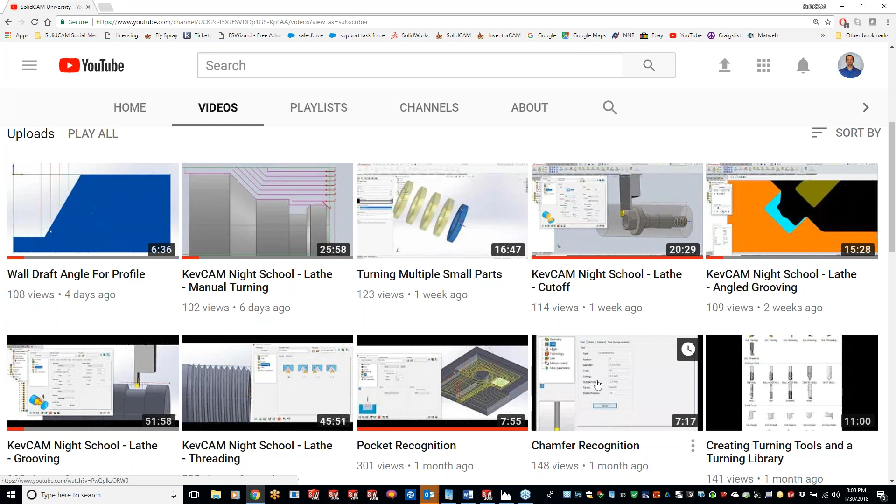Okay, so let's get the ball rolling here. So like Steve said, we are doing trochoidal turning tonight. And trochoidal turning is basically benchmarked off, or a knockoff of iMachining for milling. There's just a couple of differences in there. With iMachining for milling, you just put your material in there, and you put what cutter you're using, and it automatically figures out the feeds, speeds, step downs, step overs, angle of engagement, and all that stuff.

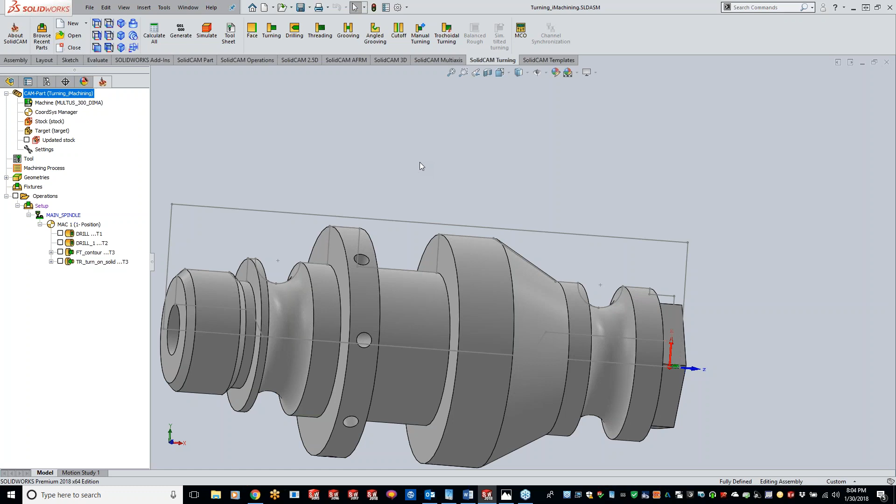When you get into an iMachining pass, what it does is start with a morphing spiral, working its way out, and then when it gets into the tight corners, it's going to automatically switch over to the trochoidal movement for you. Well, that's where the parts or operations are the same. So what will actually happen is I have two kind of examples. We'll do one kind of U-shape right here, and then we'll do one more of a boxed off area.

And as we do the boxed off area, it's going to come in here and do the trochoidal cut, kind of working its way back, and you can set it as zigzag or one way, totally up to you. And then as it gets into these tighter corners, it's going to switch over and just kind of bite away at those tiny corners for you, and then come over to the other side and bite away at those tiny corners.

At this point, unfortunately, we do not have the slide bar wizard to automatically figure out those speeds, step downs, all that stuff for you guys. I don't know if that is in the works. It's been mentioned, but I just don't know if or when they're going to be adding that in there.

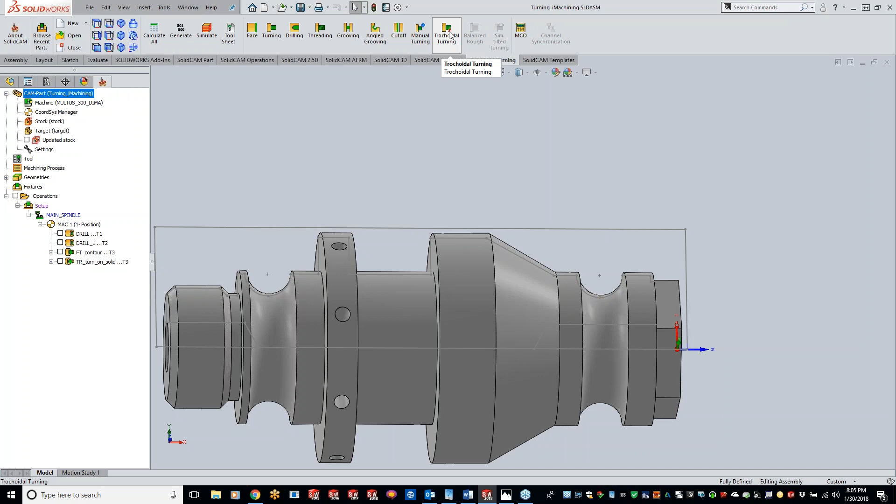So like I said, they kind of got the iMachine. You can kind of see the little iMachine logo there for trochoidal turning. So it's partially there, but it's partially not there, I guess you could say. So let's take a deeper look into what trochoidal turning can do.

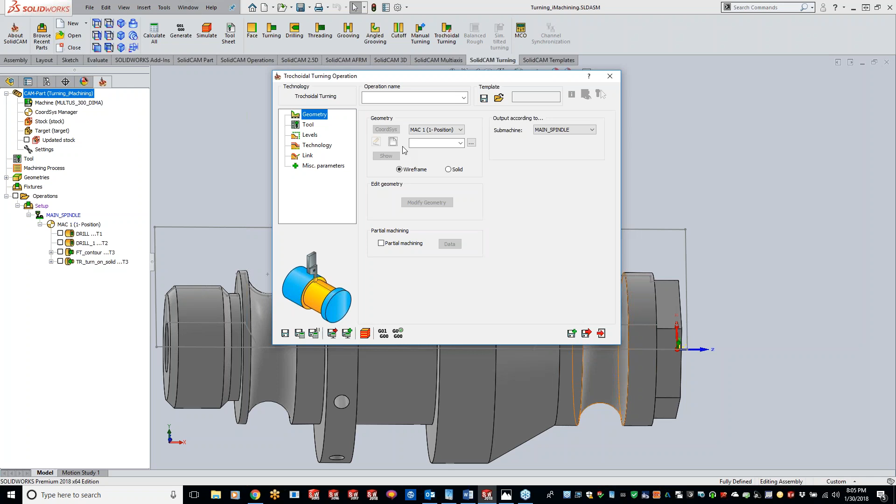So this operation enables you to turn complex profiles using a trochoidal cutting strategy. So really get that material out of there, cutting in a zigzag pattern for you guys to optimize the toolpath and really use high cutting speeds to reduce the wear on your cutter. So for our first bit of geometry, we'll just grab this little U shape here. Okay, hit the green check mark there.

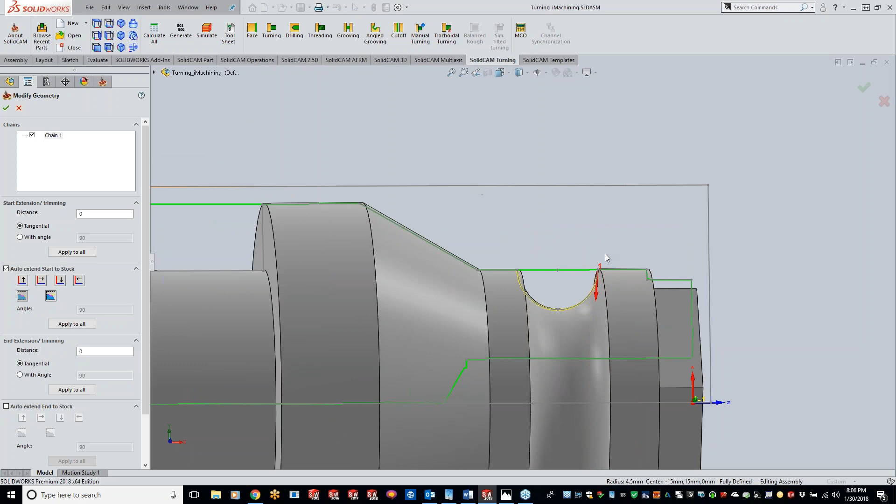All right, so we can do the Modify Geometry. It's already down to size, so I really don't need to extend the geometry up and over, because as you guys can see, our green line is our updated stock here. Our gray line up here is the stock that we started with, so anything green, we still have material left over. So you can see we have our little loop here, and then we have what we call our box area right here. So we'll do the loop first.

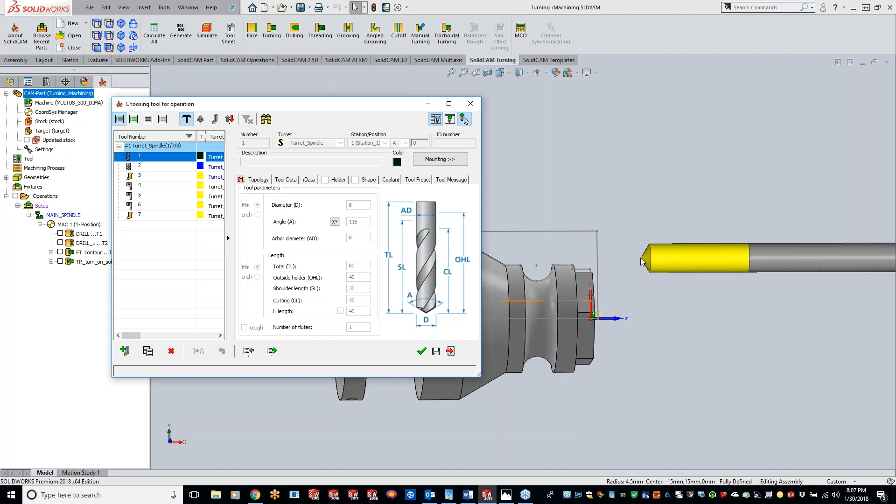And the only reason why is that with trochoidal turning, it's all based off of angle of engagement. We really can't specify an angle of engagement on a sharp edge, so it needs to be round. If you guys remember when we were talking about iMachining, you got the contact point, the ACP. That's kind of what we're shooting for. We got the round area, and we need to be able to cut into that area.

So I'm gonna grab this tool number 4. You can kind of see it's a button cutter, I guess you could call it. And like I said, this is the only tool that's going to be acceptable. If you guys grab another tool, and I'll grab this one right here, even though it's kicked off at an angle, I'll show you the alarm that's going to pop up. So let's just do save and calculate real quick so I can show you that alarm. Oh, maybe it's not going to alarm out on me.

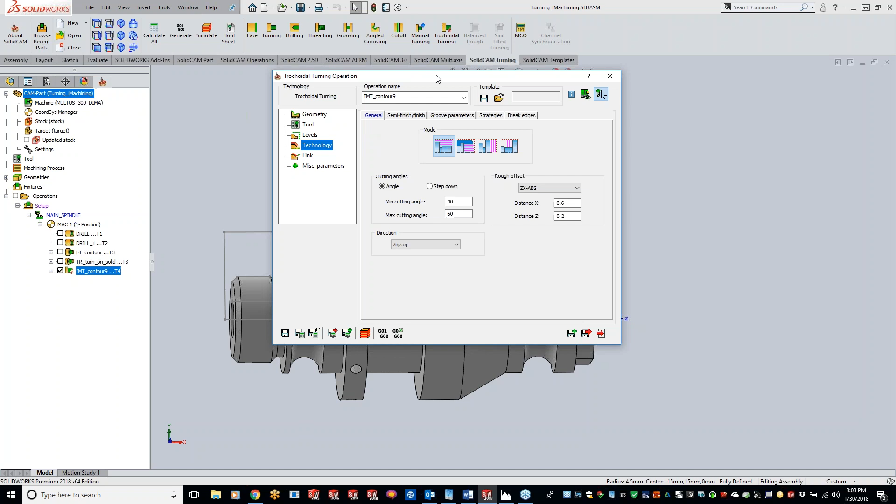Usually when it kicks out something that's not 100% correct, it's going to pop up with an alarm saying please check the geometry as it's not defined, or something along those lines. It's a little confusing at first, but when you think about it, it's telling us that the geometry is not fit for that cutter. So we just have to switch out the cutter to what we're looking for. So let me get my tool pointed in the right direction here and get rid of the additional angle there.

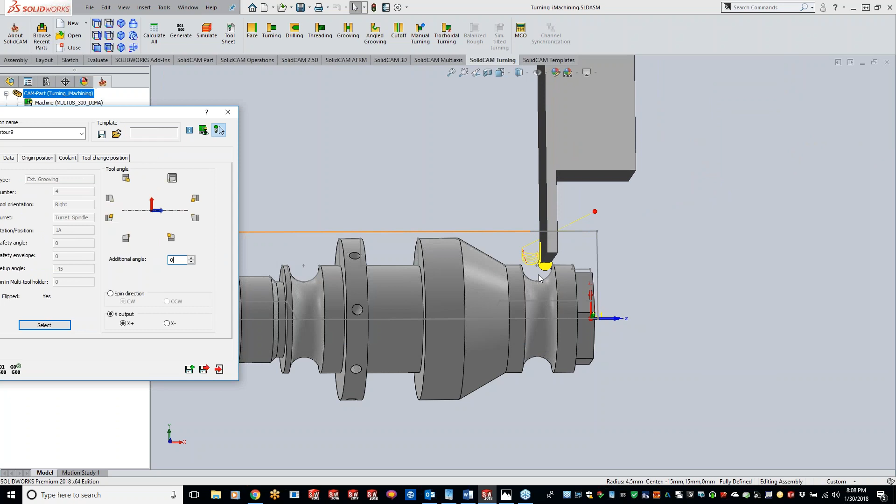Okay, so we got our lollipop cutter here, just going to be coming in there and going back and forth. So let's get to the good stuff. Levels are always going to be the same as what we've been going over. This part is done in metric, for you guys wondering why we have such a large safety distance here. Okay, so like we've talked about in the past, the modes right here are usually going to be defaulted to the correct area for you. But if not, you guys can change it.

So we have long external, or basically just an external cut, internal cut, a facing cut, and a backside facing cut. Now, this whole thing is going to look identical to turning, minus just this portion right here. So if we go to semi-finish, it's the same as what you guys saw in turning. Since we're using a grooving tool, it brings up our grooving tool parameters. And then the strategy, do we want non-descending motions or descending motions, and then the edge break. So we're really going to focus on this area more than anything tonight.

So for this one, you are going to have to input those minimum and maximum angles. A lot of the time, the default numbers will work out just fine. For this one, let's just try running a 30 degree angle and a 45 max degree angle.

That's going to be the maximum and minimum angle of engagement of that cutter that you guys can input. You can also do it by step down, so if you just want a minimum and maximum step down, these numbers come real nice because the manufacturer will actually tell you how much it can take per pass. Now with trochoidal cutting and iMachining, you can usually take those numbers and go quite a bit past that, but you guys know your machines and tooling more than anything, and as you're listening to that run, you'll know where that sweet spot is and how far you can push the limits.

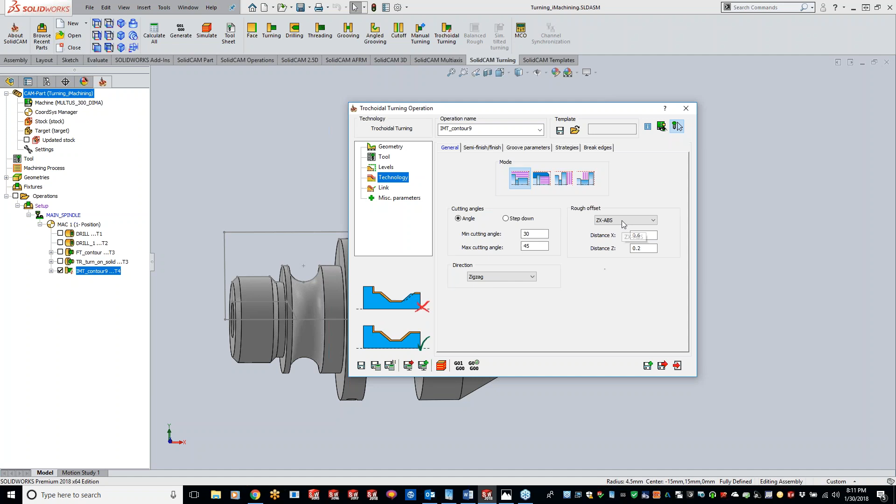And then the rough offset - how much do we want to leave for that finishing pass? We can leave different distances for X and Z like we normally do. For this one, I'll just set it up as distance, and I want to leave 0.3 millimeters on there for us.

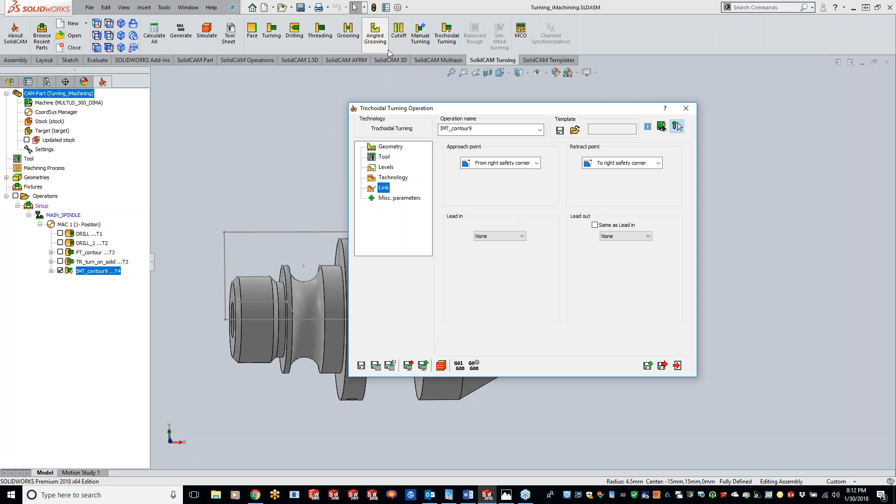Then we go to our semi-finish finish page right here, and I'll just leave it on ISO-Turning method, doing rest material only. We can turn cutter comp on. The rest is pretty much the exact same thing as what I showed you guys in the turning operation. So let's do a save and calculate.

Let's see what we created here. You can kind of see we're doing our zigzag, coming up, loop up, come back down, loop up, come back down, working our way down in there. So let's take a peek at our turning simulation here - let me zoom in for you guys and slow it down.

So there's our cut going just back and forth, getting that material out of there. Let me speed it up a little bit here - you guys are gonna be falling asleep on me.

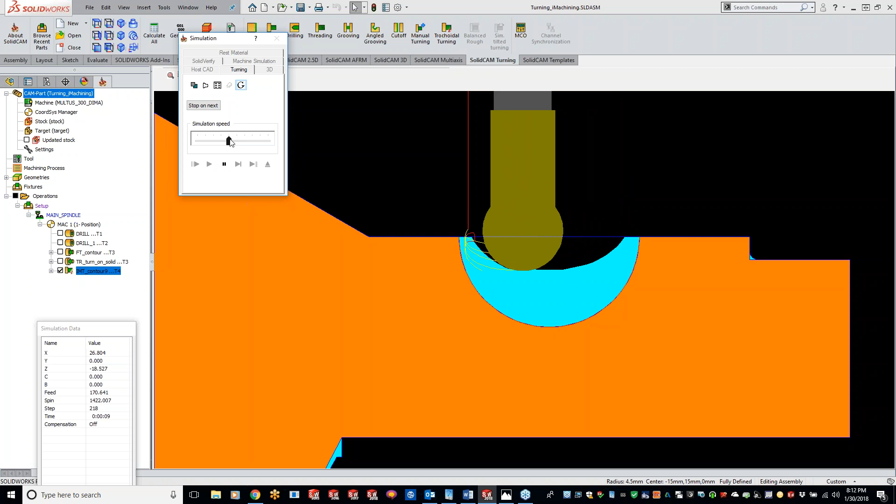Kevin, same scenario as anything involved with SolidCAM - start at the top of the tree, work your way down, right? Yep, that's a great point. I kind of shied away from that, but absolutely. So like Steve said, start at the top, grab your geometry, and just keep working your way down the list. A lot of times you aren't going to get past that technology section, especially if you don't need to put a lead in and lead out, we can just come right to technology and you're done. That goes for milling too - we have the miscellaneous parameters and some other options down here, but a lot of times you just get the geometry, tool, levels, and technology, and that's it. Just start at the top and work your way down. Yeah, great point.

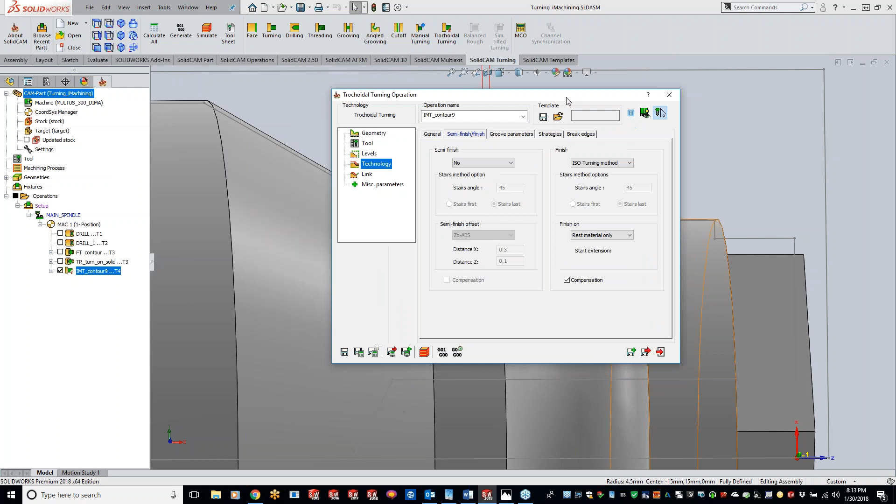Okay, so let's hop over. Any questions on doing just a round U-shaped pocket here? Okay.

So let's get into the more square style, so we can go where this is really going to help us out, especially getting into those sharp corners. We'll go ahead and grab trochoidal turning again here.

And I want to start here and end right here. Hit the green checkbox.

Now, for any confusion, if you guys haven't watched any of the other turning classes, this does not need to be a closed chain. It can't be a closed chain, just period, because we're doing a turning operation.

You just click on where you want to start and where you want to end, and it's going to fill in everything for you. Just make sure your arrows are going the right way, because if our arrow's going that way and I come to click on this side, it's going to wrap the chain all the way around the entire part, which we don't want. So if we just start here with the arrow going down and I want it to come around, we're good.

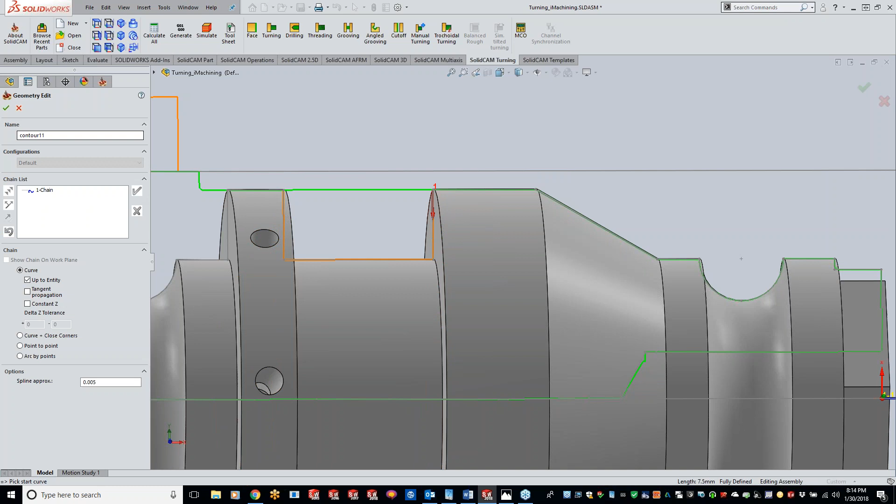Hit the green check mark. And modify geometry, we can just take a peek, but our previous operation already got that material down to size, so we're good. We don't have to add any in there.

If you guys want to add those extensions in there, we can just manually type those in right here. Or you can highlight the number you want and just click, and it will add that number in there for you.

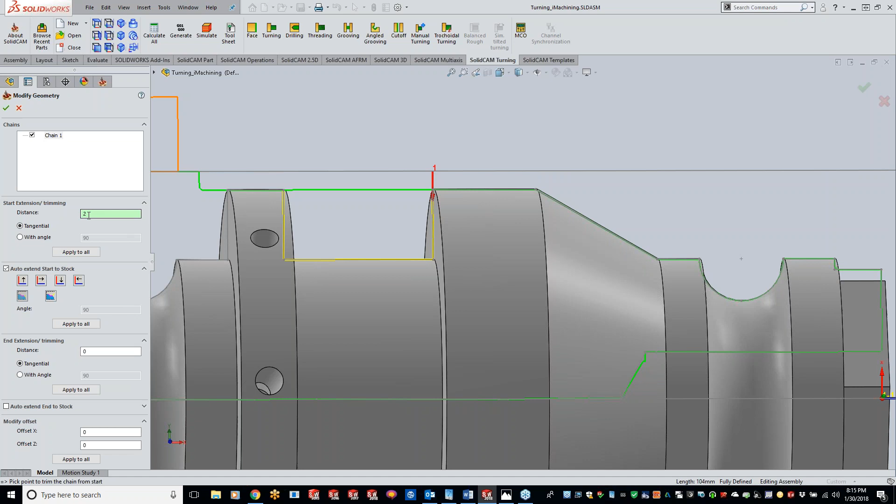So, okay, we'll accept that.

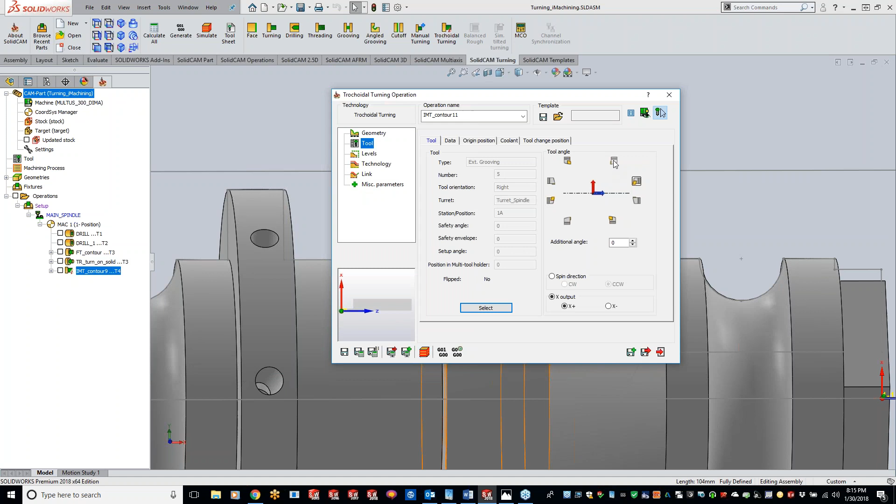And for this one, we'll grab another button cutter. Grab just a little bit larger one here. So we're using a 6mm button cutter. And get my tool pointed in the right direction here. So it looks good.

I always kind of like to come in here, especially more turning than milling, and have my tool come in here and get everything, make sure I'm pointed in the right direction, my tool is oriented. If you guys are working right now and your mouse isn't showing that, just click this little button right here, the visual tool, and that will pop up the tool for you.

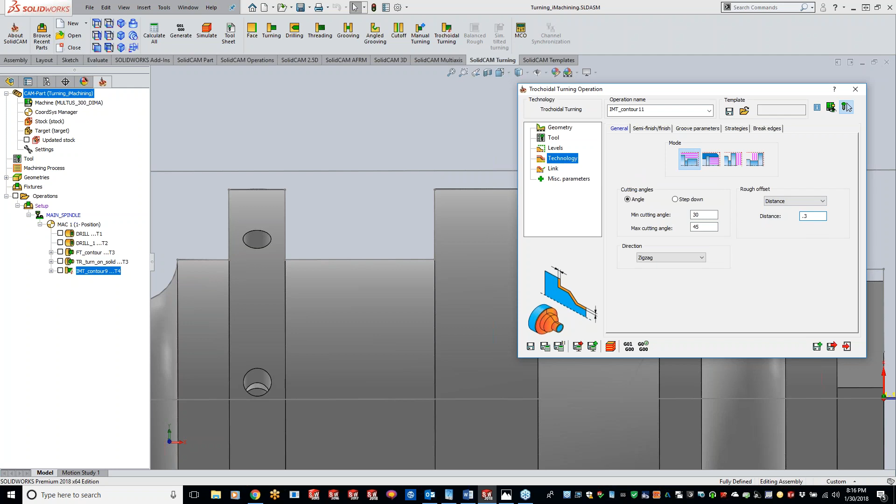Safety distance, I'll just leave it standard here, and I'll use that same 30 and 45. For this one, we'll just do another distance here, the same 0.3mm. Save and calculate. And there we go.

So let's go ahead and simulate this.

Now, you guys can also use this on partial pockets. So if we didn't have this space over here, you guys can set that up to do as a partial pocket. One of our customers, I think it was one of your customers Steve, was doing a partial pocket, but he wanted to go just one way, starting in one direction versus the way it was shown.

You guys kind of know with iMachining for milling that it pretty much starts where it wants to. We can try to guide it in the best direction, but it just looks at the optimal toolpath. Well, this particular customer wanted it to start this way and this way only, and we actually got that changed, implemented in the next service pack.

So you guys will actually be able to, based off of the chain direction, if we would have chained over here and started this way, it will go the way that we specified. So if you guys remember, let me just play this through again. I actually chained with the arrow going down this way, over and up, but I'm starting on the left side, the opposite side that I selected. So it's been fixed and put in there.

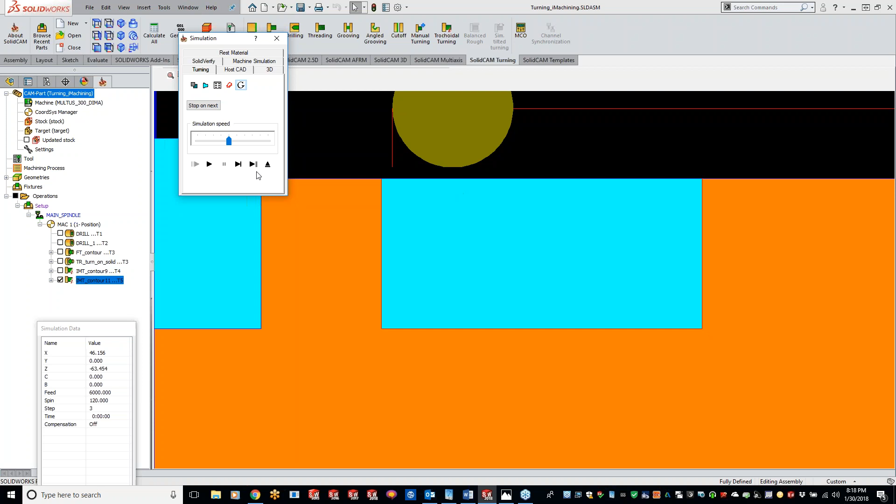Now, if you guys want to, there's another way of going about it: you can change up your angles a little bit. If you just change your angle up maybe 1 or 2 degrees, it will actually start over here because it's all based off of the angle of engagement. So let's play this through right here again.

So Kevin, really just the trochoidal turning is going to be faster for getting the bulk of the material out of there again? Yep. Okay.

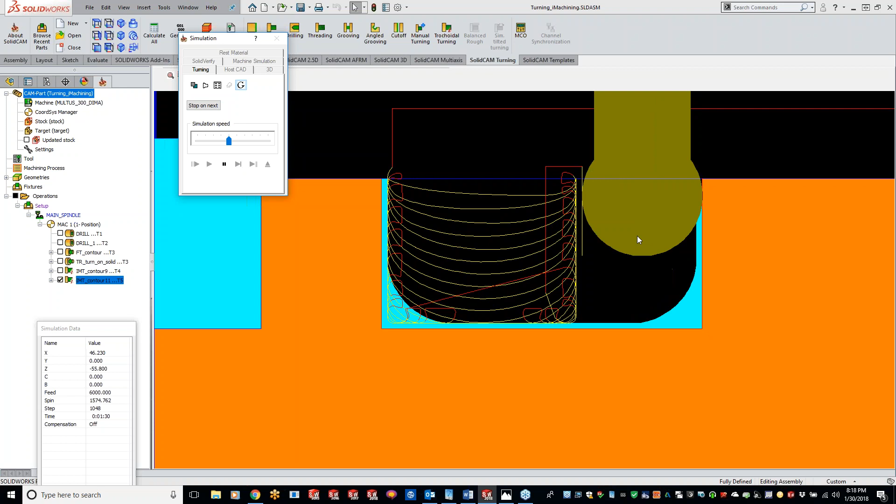Absolutely. We can come in here with a grooving tool and groove it out, but we're still going to have a lot of cut time, pecking it out or going down over pecking it out, versus what we can take with that button head.

Gotcha, makes sense. And if you kind of look at the toolpath here, we're swooping in, but as it gets into the corner where it knows we've got a 90-degree corner, obviously we can't stick that button head into a 90-degree corner because it'll snap off.

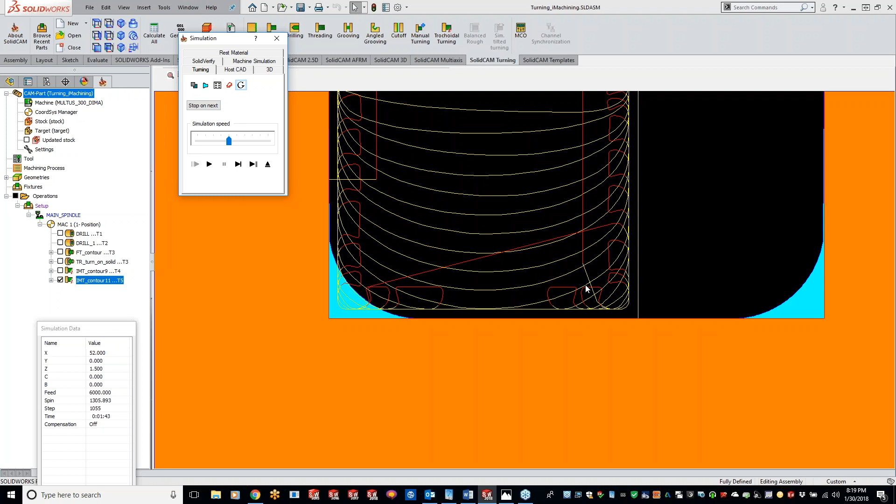That's where it automatically switches over to. It's not really a true trochoidal movement, but it's along the same lines of taking nice little slice cuts to keep within my specified min and max angles that I told it.

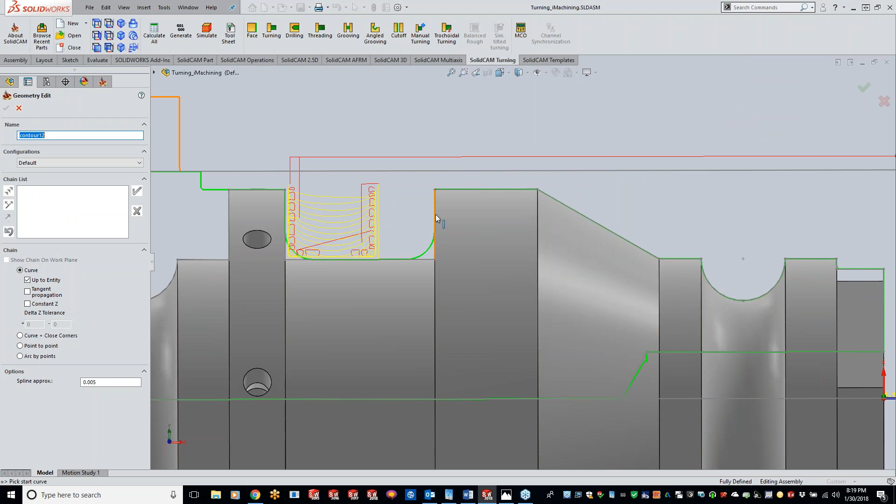Nice, and then you just go in there with another tool, Kevin, to polish off those corners. So then we can come in here with a groove, grab that same geometry. I think I have a grooving tool in here, so we'll find out real quickly. Let's see, that's a button. There we go, that'll work.

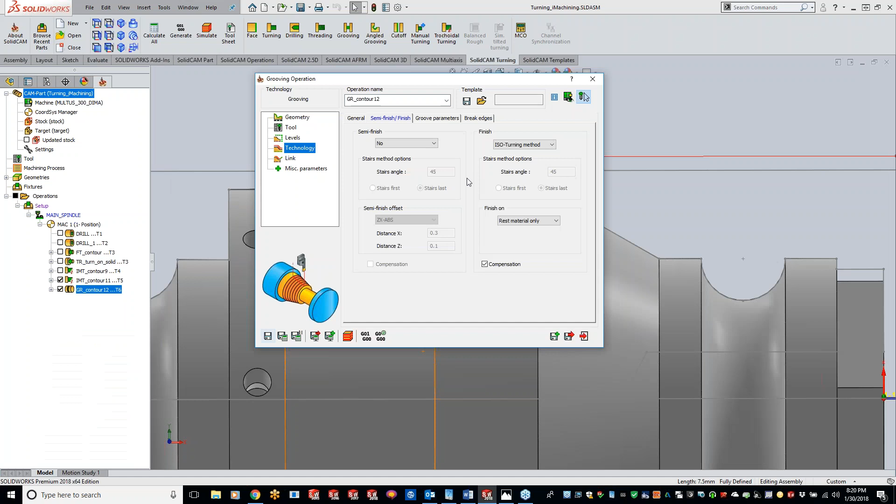We could do a roughing pass if you guys wanted to, or we could just go to our general here, do finish only, and just do ISO turn method for rest material. It's going so fast, I can't. What am I missing here? Let's do entire geometry. There we go. Nice. So to come clean out that material in the corner.

So for turning, there's just not a whole lot in there just because turning is so simplified, but at least with the trochoidal turning, you guys have control over your min and max angle of engagement, or if you want to set up a step down, that's just another strategy for getting that material out of there.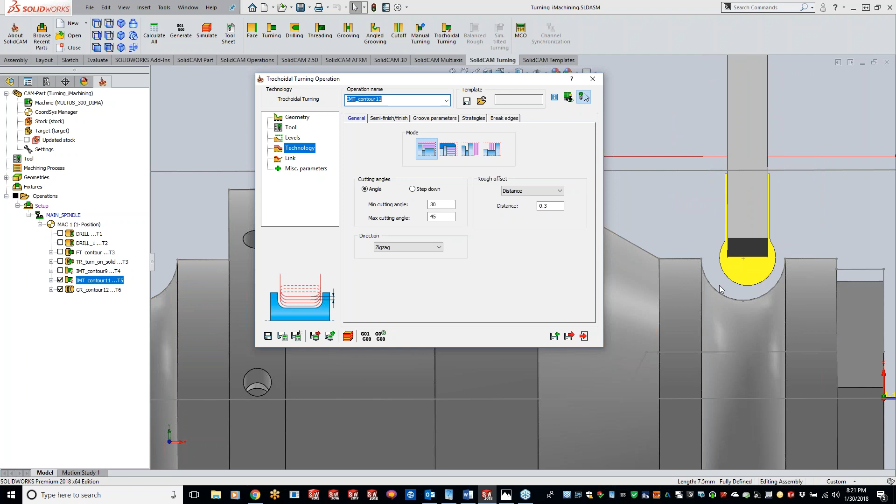For this one right here that we're using, we were able to rough and finish it off. With this one over here, obviously we can't get in the corners, but we know we can get it right to size, but still be able to use a high feed rate since we're using that trochoidal cut. So we could really ramp up our inches per rev, or RPM and inches per minute, or millimeters per minute in this particular case.

But that is it, guys. Any questions?

Ronnie, I loved your comment: more control is always great. And that's our philosophy around here - hey, we're going to give you the tools, we're going to put them in your toolbox, and let you apply what makes the most sense to the particular part, geometry, material, and attack it the best way you'd like.

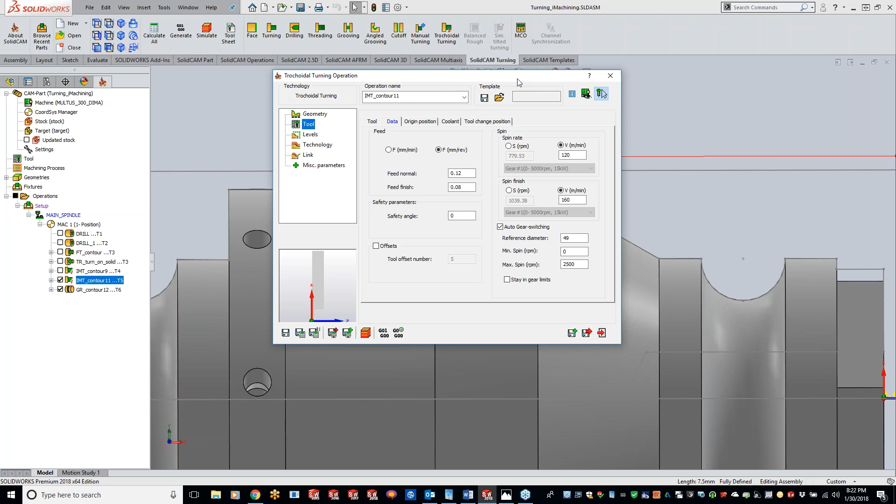Yeah, absolutely. And I think Ronnie, you're asking, could you have used the finish groove tool to rough it? So Ronnie, are you asking to use that groove tool to do the same thing as what we did right here with the trochoidal turning?

No. The only reason is with trochoidal turning, it has to be a round insert in there. It will not take a square insert. So it has to be a button style grooving insert. Last I checked - let's test it.

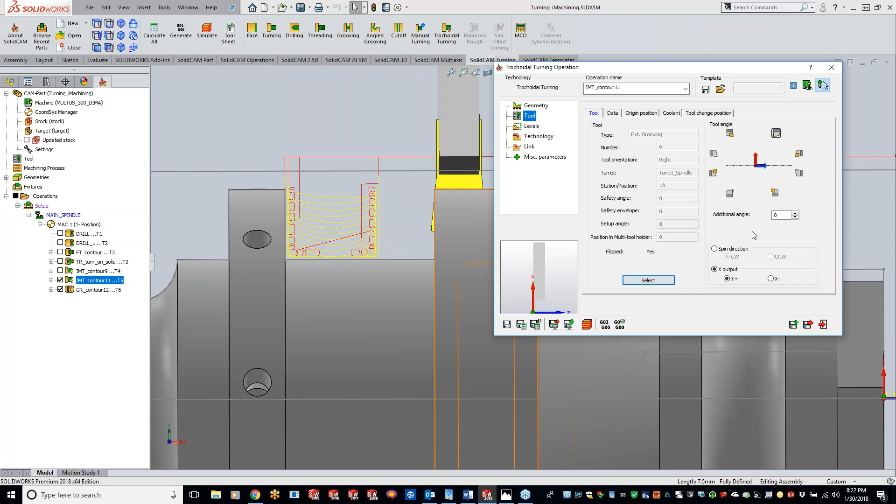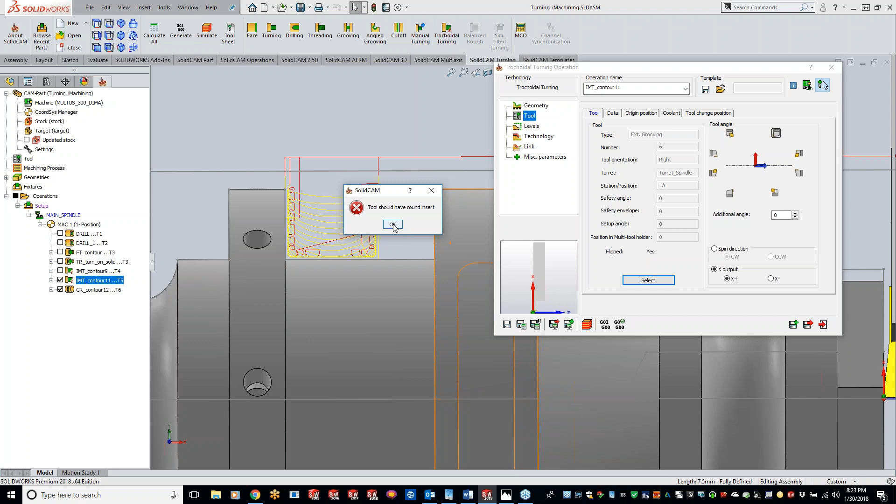Yep, so here's the error that pops up - tools should have a round insert. Sorry if I didn't make that clear, Ronnie. But to go over it again, for trochoidal turning, it does have to be a round insert to go in there, and that's only because we can't really figure out angle of engagement off of a square corner coming in there. Great question though, no doubt.

And then anybody else? I don't see any others. For those of you guys that have sent those ideas over to me, I know I got one that I just sent out to headquarters to send off SolidCAM swag as an idea.

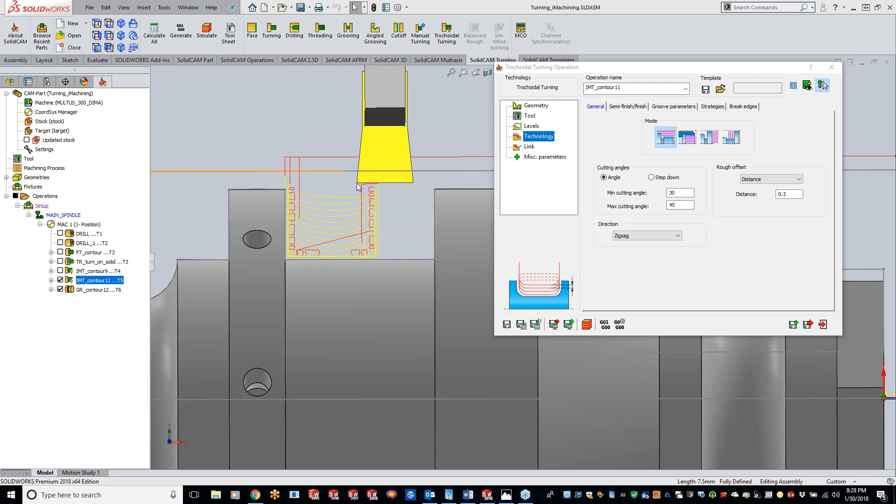Yeah, absolutely, guys. And with that being said, next week we will be getting into balanced roughing, so using that upper turret and that lower turret at the exact same time. So it should be an interesting class. Hopefully not confuse anybody and go through the nitty gritty of the balanced roughing. I know a lot of you guys don't have the upper turret and lower turret, but want to see it. So I will gladly show it for you guys and go from there.